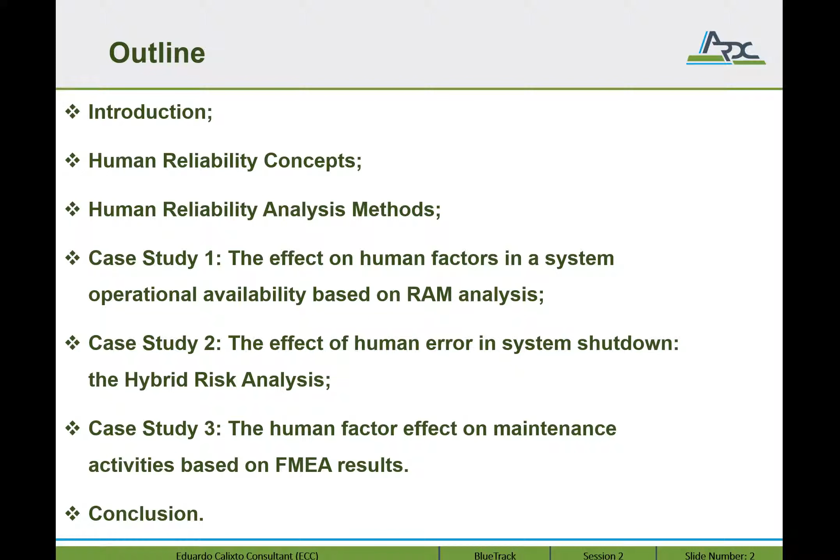My objective in this presentation is to demonstrate how easy and feasible it is to apply human reliability. So my objective is that in the end you get some clear idea about some methods and see how easy it is to apply human reliability and how important as well. So you can later on use this introduction looking for more information and of course applying it in your projects and daily activities.

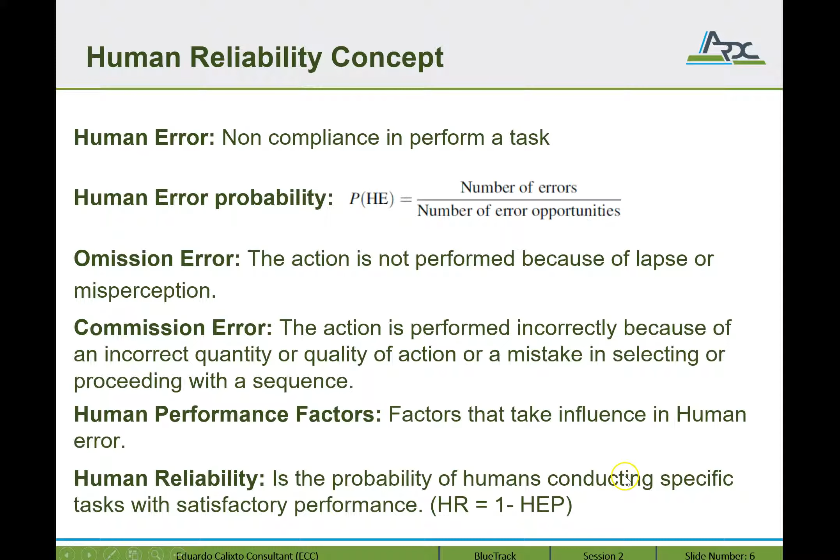And human performance factors are the factors that take influence in human error. So for example, the ergonomy or the stress or the procedures or the supervisors, those are all human performance factors. And you see how to take into account the influence of such human performance factors in our analysis. And human reliability is the probability of a human conducting a specific task with satisfactory performance. So human reliability is 1 minus human error probability. Okay, so just basic concepts, we will go through more details further on.

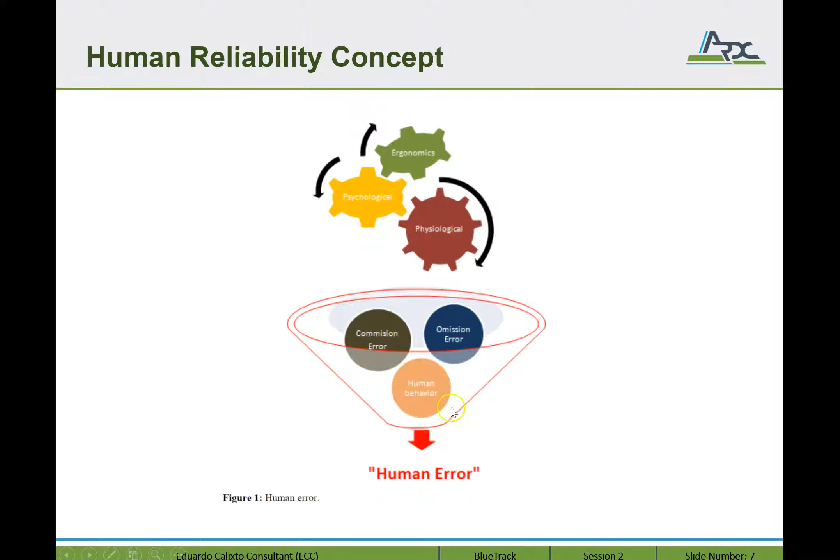So basically, to give a general overview of human error. Human error occurs after you have some conditions, performance factor conditions, and the combination of such performance factors will trigger some type of omission or commission error, and considering the human behavior, you get a human error.

Okay, so let's give a more structured picture of the human error. So human performance factors are the factors that influence human error. So we can have internal human performance factors such as psychological and physiological factors, or we can have external, that's social or technological aspects. So the combination of these aspects, or one or more of them, will trigger omission or commission error, and then you have human failure.

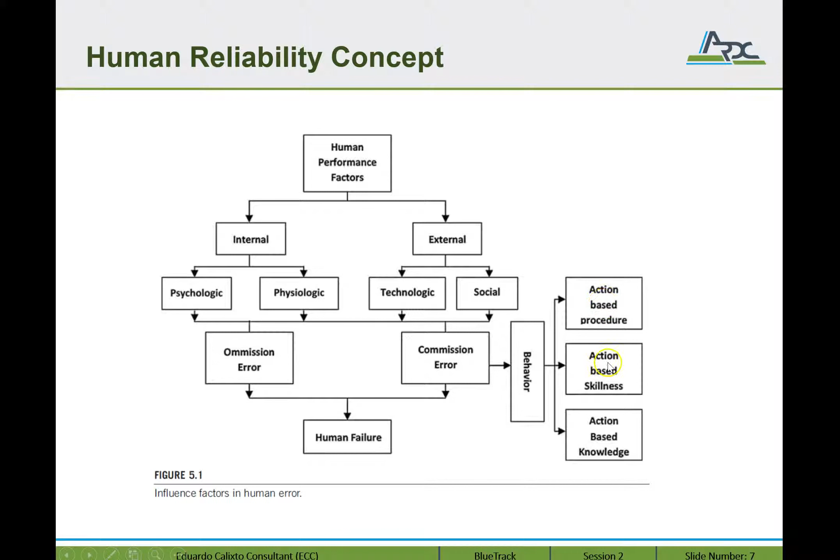The other very important point is that when someone performs some task, we need to understand the type of behavior to perform this task. So basically, some tasks are based on procedure, others based on skill, others based on knowledge, and we need to take into account what is the behavior that is essential for a specific task in order to propose the proper recommendation to mitigate the human error probability.

Okay, so let's go through the techniques, the different human reliability methods. So basically, we can say that in the very beginning, we start with methods that want to predict the human error probability. I will present these methods in detail, but you can see some of them. For example, the technique for human error rate prediction was the first one, defined in 1975. And after, we have the operator action tree, another one that we're defining here, and all these four methods I will define and go through in detail.

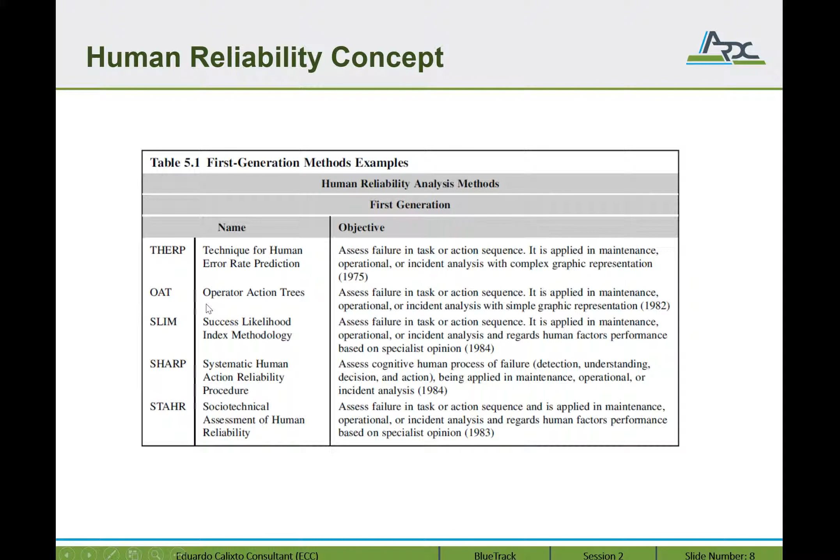But basically the objective in the beginning was just to define the human error probability, and after that we can start to see in these two methods here that the accountability of human performance factors is starting to take place. And then the second generation is starting to look at cognitive factors. So we'll see the cognitive reliability and error analysis method in this presentation. And the third one was to also consider the influence among the human performance factors, and that was the Bayesian network. So that's the last discussion and the last method implementation that we have concerning human reliability methods.

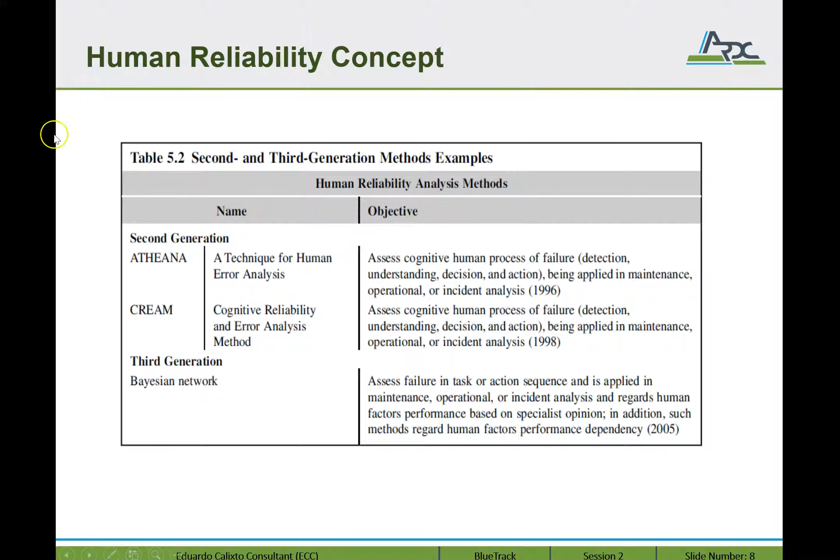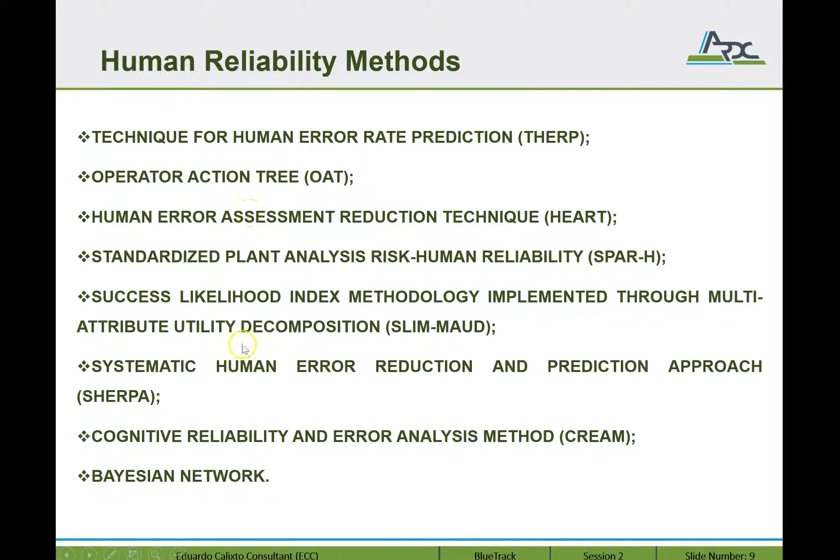It's important to say that all these human reliability methods are applied and defined in procedures. Most of such procedures were applied for nuclear power plants or the aerospace industry, and many of them were defined in the US or in the UK. You can have access if you look for these methods, and there are a lot of papers. In the end, I will present some bibliography, and then you can look for the specific procedures. So let's go through these methods now, and I will explain them one by one and give an example.

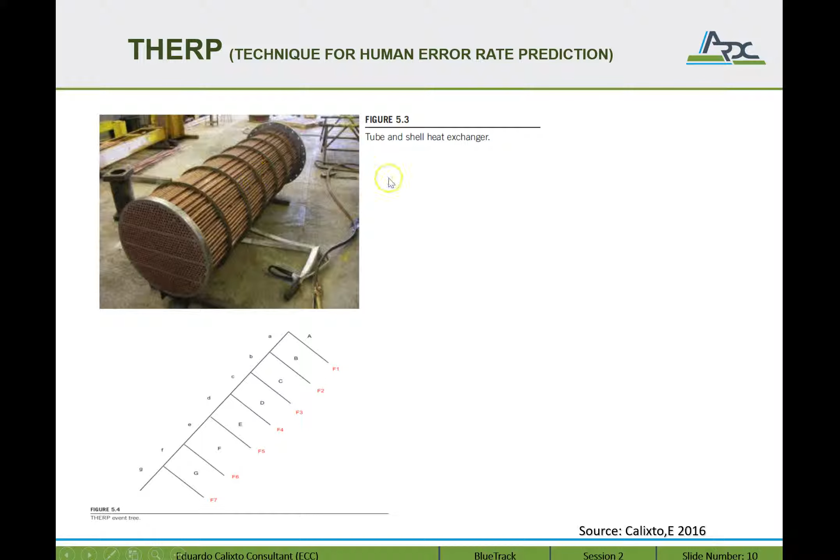So the first one is the technique for human error rate prediction. So let's consider that we have a task that we need to perform on a tube and shell heat exchanger, which is very common for human reliability. So based on the THERP method, we need to define, as usual for human reliability analysis, the steps of the task that need to be carried out. And this task can be defined in this THERP event tree. So on one side, I'll put all the success probabilities, and on the other side the unsuccess probabilities.

That's described for failures. So the human error probability of the sequence will be 1 minus the probability of success. So depending on the data that I have, I will use this equation here. So let's say that I have the probability of success, so I just multiply all of them. It is a sequence of activities. That means if one fails, I will fail the whole task. So in the end, I will have my human error probability.

The main question is, when I do not have a database, how can I get such information? And to answer this question, I show this template here. That is one of the examples of sources of human error probability where, depending on the type of error and the performance factors, we can define some probability of error and input it here. So for example, we are using 0.0005 for the first human error probability here.

So that means we consider the first task, operators check and stop equipment, as an omission error if they do not check; they have a long time to check, but they can forget some step that needs to be carried out. So we define it as an omission error with a long time, so we get this value here. So it's one way to do that. If we have a database or we can elicit specialist opinion about such probability, we can also apply it here.

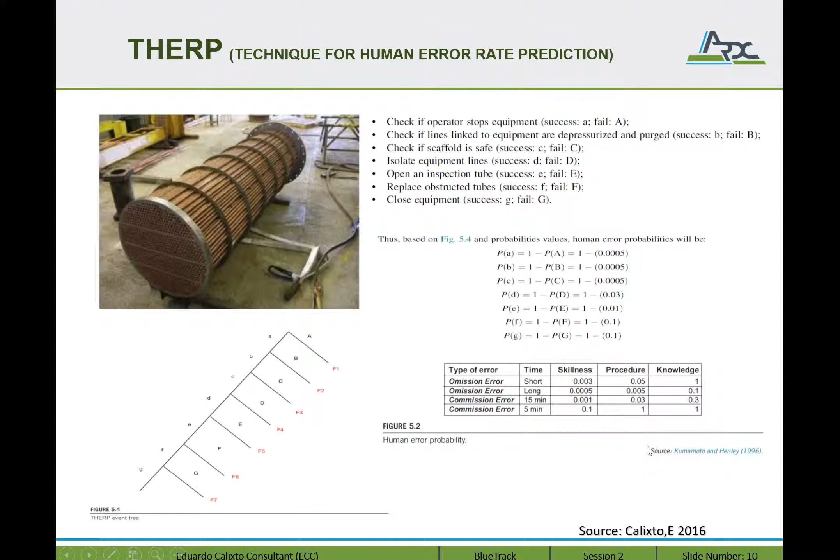It's just important to demonstrate that this is an example of templates, but we have some templates, as you're going to see in my presentation, that demonstrate probabilities of human error, so that you can have an idea or get such information to perform some human reliability study.